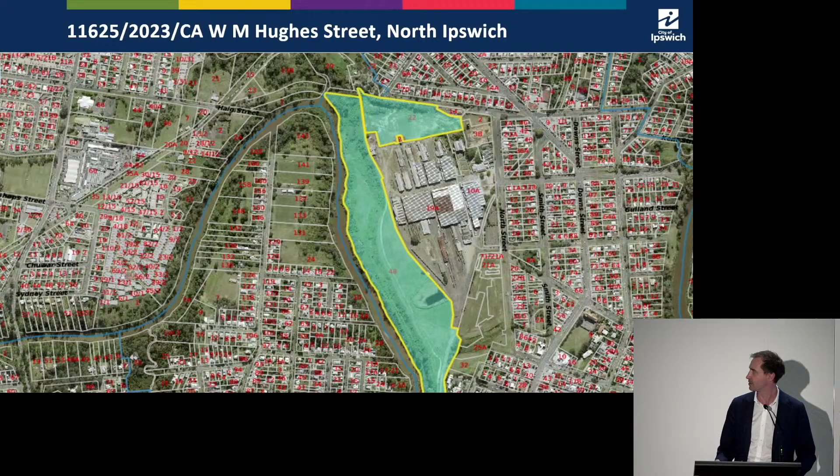Sorry, there's the site, as I'm sure you all know it. And there's the panel members. I forgot to do this before as well. Our speakers today, we've got a number of them. The first speaker will be Boyd Sargent on behalf of the applicant. And then we have submitter presentations from Shane Earle, Peggy Merriman, Liz Tilbrook, Nick White, and Adrian Dean. So we might launch in. And the first speaker, I'll welcome Boyd Sargent.

Thank you, panel chair, elected reps, community for turning out today, as well as the officers for showing up, for this, our opportunity to talk about the application at W M Hughes. This is one of a number of developments that our client has undertaken in this specific area, and this is probably one of the most exciting for Ipswich that we believe is being proposed at the moment.

Just briefly on the proponent, it's LEDA, who have a long history in developing within Ipswich, with over $1 billion worth of development currently underway in Ipswich itself, delivering affordable homes for families and the key workers of Ipswich, and direct and indirect jobs. Importantly, and for this application, they're also the owner of Riverlink Shopping Centre, which provides over 2,000 jobs for the people of Ipswich and would service this development as well.

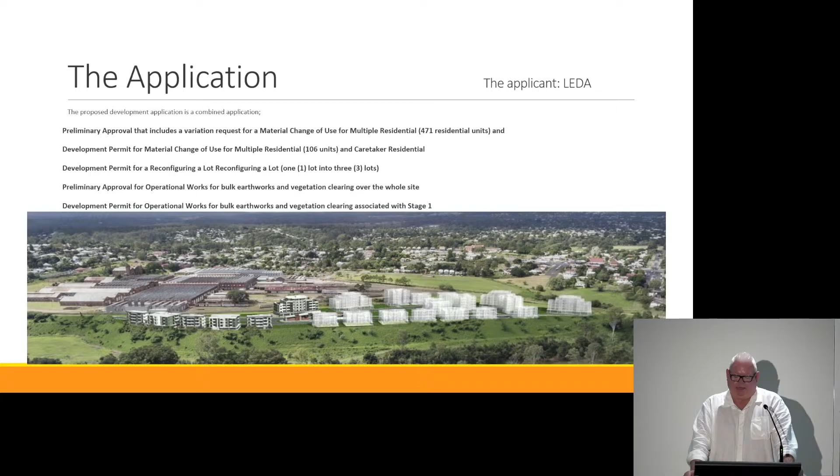In dealing with what we are talking about here today in more detail, what we're talking about is delivering an affordable housing unit complex under a group title management system for the site at W M Hughes. The application includes a preliminary approval. So in terms of the preliminary approval aspect, that sets up the framework by which the future applications on this site are assessed. It includes a number of plans and concepts that would be sought for approval to deliver the overall concept. Importantly, the application also includes stage 1, showing the commitment for development of this site and the ability to deliver housing quickly and in a well-serviced location.

The application, as indicated there, includes a number of other components of development approval, which is designed to enable us to quickly get on the ground and start delivering these houses that are in much need for the location. The proposal does rely on number 22, W M Hughes, for its access onto W M Hughes itself.

In terms of this site, as I've mentioned, it's one of 4 that LEDA is looking to develop and partner with and fund others to develop. The site has been appropriately zoned, as have the other 4 properties, but I'm joined here today by Brendan Nelson, who is from Solve Property, to assist in giving some background to the zoning and this site and the others that occur in this specific area.

Thanks, Boyd. Brendan Nelson, Town Planner. I was a development manager at Ipswich City Council for almost 7 years. Was also the National President of the Planning Institute of Australia, the Queensland Planner of the Year and the Australian Planner of the Year, and was also the head of planning for the Queensland Reconstruction Authority. So I have been working in and around this space for some time.

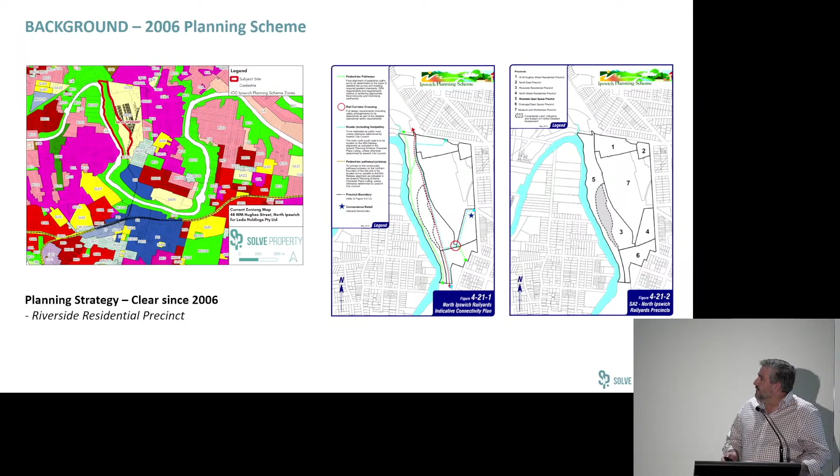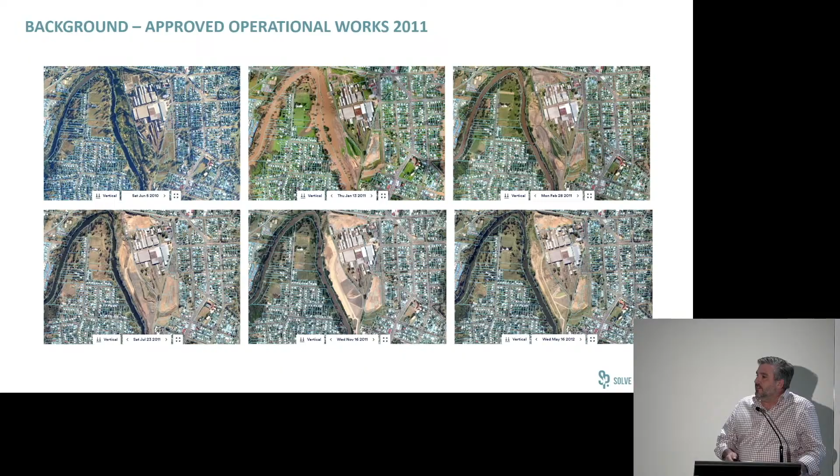There was obviously quite a series of defining events that have impacted this site. And I think it's important that the panel are aware that the flood event from 2011 actually occurred prior to the approved operational works that occurred on site. And so whilst that happened earlier in the year, the operational works happened later in the year, and they were approved engineering works. And so what you'll see in that time series of photos is actually the works that occurred after the 2011 flood event. So when you see flood lines in the old scheme that refer to cutting across the residential precinct, they were predicated on the original flood line before the approved engineering works.

I just wanted to touch on this before I throw back to Boyd. I undertook a review of the site for the landowner in relation to the 2024 scheme, and particularly into the proposal to back zone the site. What I can say to you is that I went through and had a look at Council's feasible alternative assessment report, which is a statutory requirement under the Planning Act.

I think it was an incredibly comprehensive review by Council, and Council should be congratulated. That particular review identified 1,727 lots which were suitable for split zoning across the city. This site was included in that particular group for split zoning, and of the 1,720 odd that were identified for split zoning, there was only 8 that I could find which were back zoned, and this was one of those.

The other 3 of the others were owned by Council. There was one at Riverview where there was strong circumstance to support it, and there was 2 at North Booval where the flood risk was very problematic.

So for the panel, I think it's important that you understand the difference between what's actually transpired under the old scheme, what Council's deliberate decision is in relation to the new scheme to change the zone, and the fact that Council's own feasible alternative assessment report has identified this site as being suitable for a split zone. I'll throw back to Boyd at this particular point. Thank you.

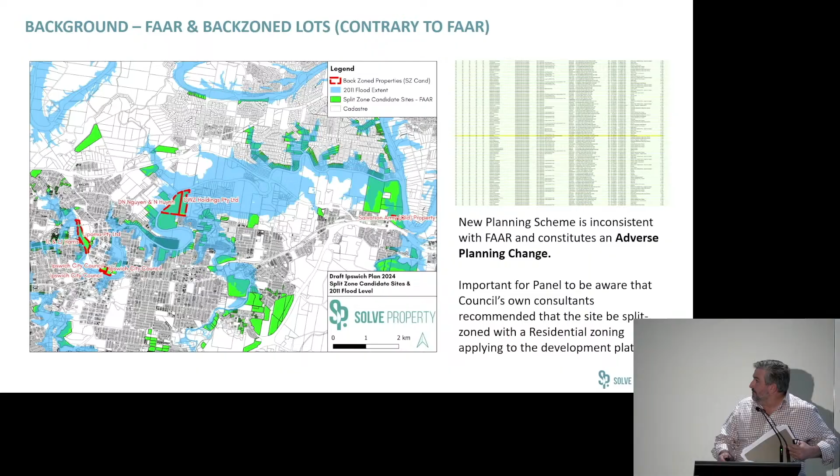Thank you for that, Brendan. That was very important information there in terms of the concept evolution over this site. And it's an important thing to realise that in terms of the application here, a lot of effort and time is spent in developing up these concepts and proposals and plans and drawings and reports that go into delivering a concept for a particular site.

Clearly what drives that and guides that is the planning scheme, and this is an application that's submitted under the existing planning scheme, and we do acknowledge the commencement of the new scheme.

Dealing with the site specifically, as I've indicated from the start, we access via W M Hughes and also through 22 W M Hughes, which has an existing approval which establishes connections in terms of road widths and road heights to our boundary and are transferred through the development itself.

The site, as Brendan's indicated, also has the benefit of an existing approval which has been implemented on and filled to between 19.3 and 21.8 metres.

This proposal, as I've touched on, is to provide over 400 build-to-rent social affordable housing product in a location that is identified, as we've indicated under the scheme, and as you can see clearly from this aerial, is connected to the Riverlink Shopping Centre and the employment, social, recreation and entertainment that is provided via that, as well as the connection into the CBD proper.

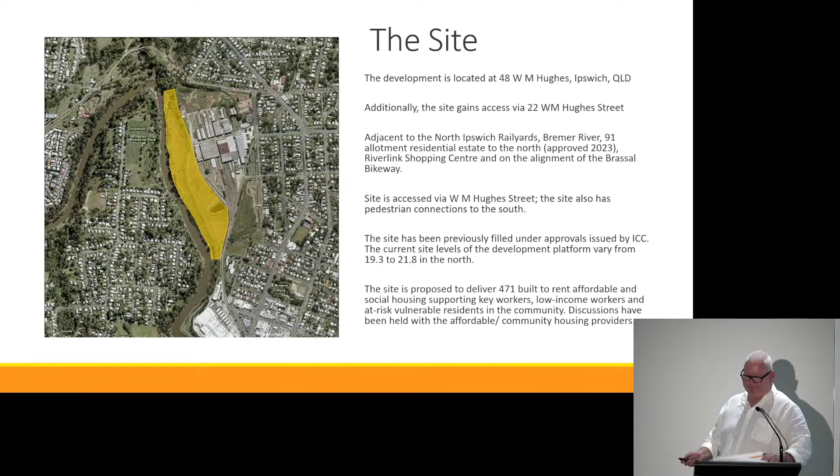As I've indicated, this is an application under the 2006 planning scheme, and importantly, as we've indicated, there's a split zoning on this site currently, open space and the special opportunity zone. That open space area largely reflects the lower terrace area on site and the flood affected areas adjacent to the Bremer River. There is also the special opportunity zone, which occurs on the upper fill platform and adjoins the rail yards.

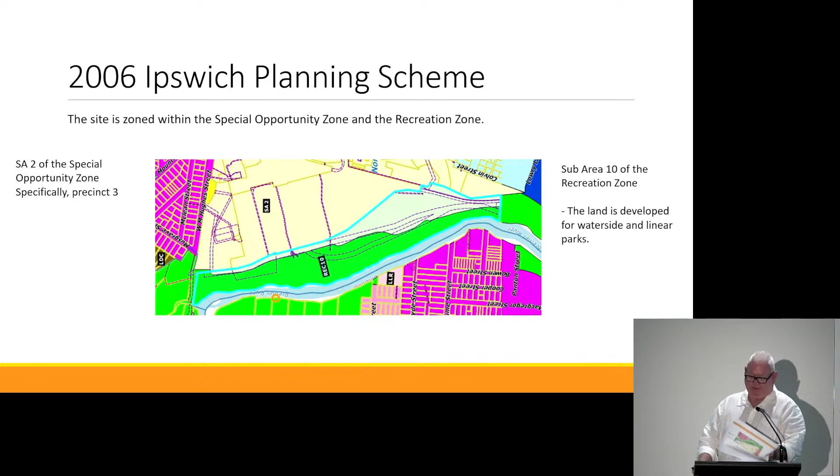Dealing with the scheme in more specifics, and as is outlined in the scheme, and as Brendan has touched on, there are a number of precincts within the planning scheme that dictate what may or may not happen over the site. We have a number of different precincts of which we believe we're consistent with the intent and purpose of. Specifically, the proposal is within Area 3 or Precinct 3, which is shown as the Riverside residential area under the planning scheme.

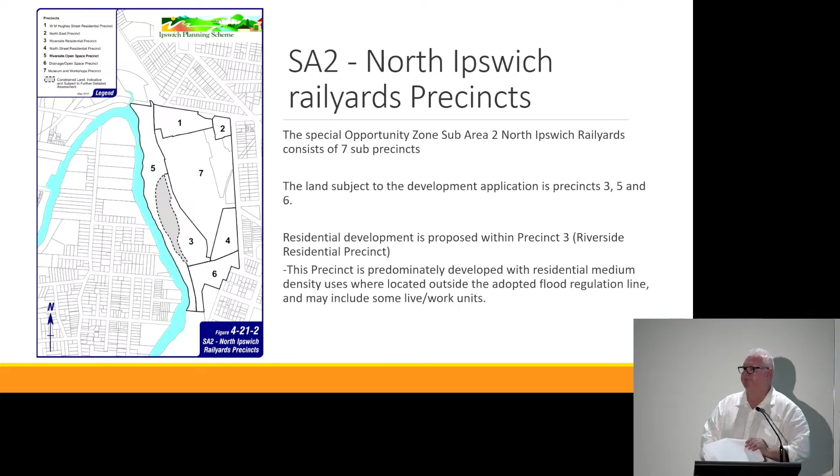In terms of how we've responded to that planning framework, has been the development of the concept plan that many of you have seen and looked at. This has been informed by various experts from heritage consultants, hydraulic consultants, ecology, urban design, as well as traffic issues and traffic assessment. So what's proposed in this concept is a new urban village at the doorstep to Riverlink Shopping Centre, providing this rather higher density development in an area that is perfectly suited and adjacent to and serviced by the principal zoned land under the current planning scheme.

In forming this concept, as I've indicated, a number of specialists have inputted their design, their planning, and their assessment as to what may or may not happen over the site, and it's reflected in this concept.

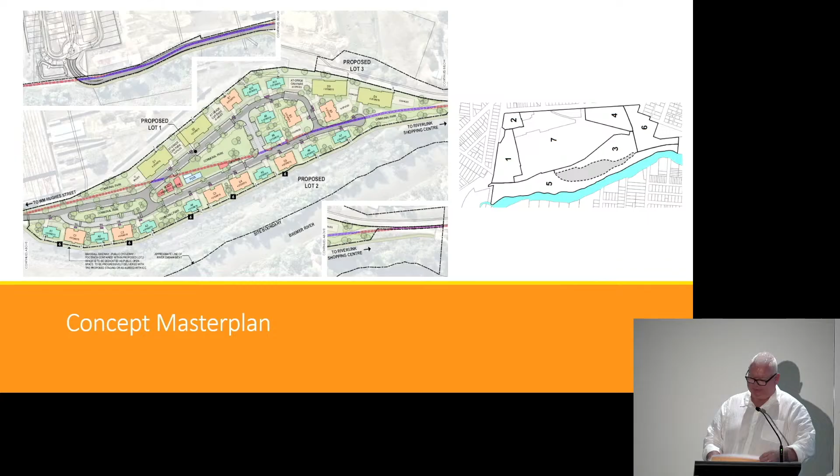As I've indicated, the application also includes stage 1, which includes the first 6 of the proposed apartment buildings on site. These have been informed by a range of input from architects, urban designers, as well as social housing providers who we've already been in conversation with for the delivery of housing in this location.

The buildings are designed and have taken on some of the character elements that are in this location. Character is an important component for the overall development, as we adjoin the rail yards, which has quite a distinct urban character. We've tried to reflect the materials and forms of that structure within our development, noting that we're apartment buildings compared to the industrial building, and then the more traditional residential areas that occur beyond the rail yard.

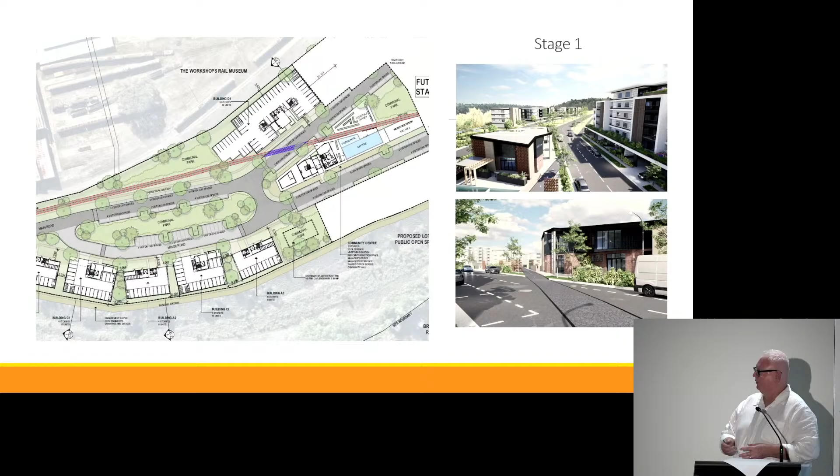In terms of our proposal and the preliminary approval, clearly we've got the existing zoning in place, and the preliminary approval seeks to establish the new boundaries for this. As part of that, we have 3 lots proposed with the application and the zonings that go with those.

Our lot 2, indicated there in the light blue, is the area intended to be open space. The dark blue is the intended urban residential area on the filled upper platform, with lot 3 being existing rail yard lines to the rail yards that are under our ownership.

In discussions with council, there's been an indication not to take public open space as part of the development, which is able to be accommodated with the area still being retained by the body corporate for their management, with easements created to enable key aspects such as the Bremer Bikeway to be delivered through the site. A series of roads will also have easements over them, so the public also has free movement through the site.

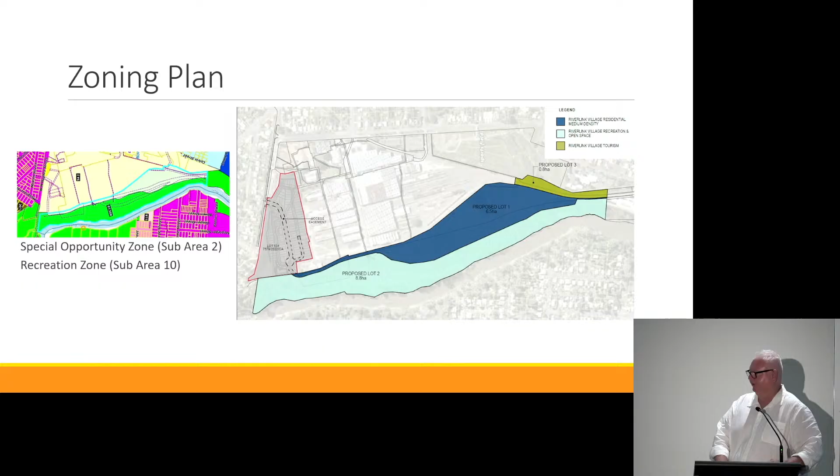In terms of the form, as I've indicated in that concept earlier on, it includes a new urban village. This is centred around an open space area within the filled platform area, and a number of buildings arranged around that cascade from the rail yards down to the river edge of the top of the platform, from 7 stories down to 4 stories.

Importantly, when we review the concept against the planning scheme, you can see the planning scheme is already contemplating multi-storey buildings and apartments at this location. This is an extract from the scheme. Buildings are generally 3 stories in height with the opportunity for 6.

Ours, as I've said, is typically 4 to 7, and that relates to hydraulics, which is why there is a slight differentiation there. I will touch on that when we get to that specific issue.

The buildings have been arranged specifically, again in consultation with the urban designers, as well as the planning issues and view analysis, to make sure that we have cascading buildings overlooking the open space areas and overlooking the Bremer bikeway, to provide high public visibility and a safe bikeway through the development site itself.

Additionally, the buildings are spaced so that we have view sharing, not only internally, but externally. So the residential areas which occur further to the east and are on higher land are also able to view through the development itself, providing a quite permeable development.

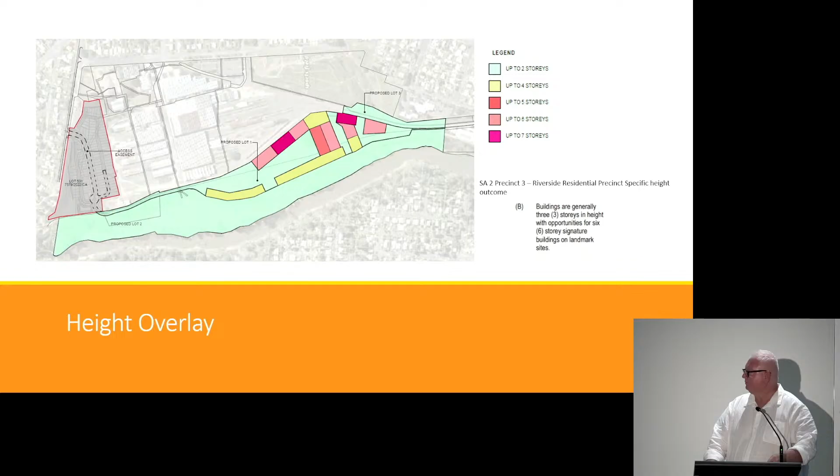Connections, and this is an important aspect to the overall development, connecting this site back to the community and connecting the community through the development and through to Riverlink. As we've indicated, the site derives access from W M Hughes.

That's our only viable access for vehicles, but we have provided active transport routes through the site and through to the Riverlink development, such that the existing community via easements, bikeways and footpaths can walk and cycle through the development, as well as the residents themselves getting through to Riverlink and also back to the wider community.

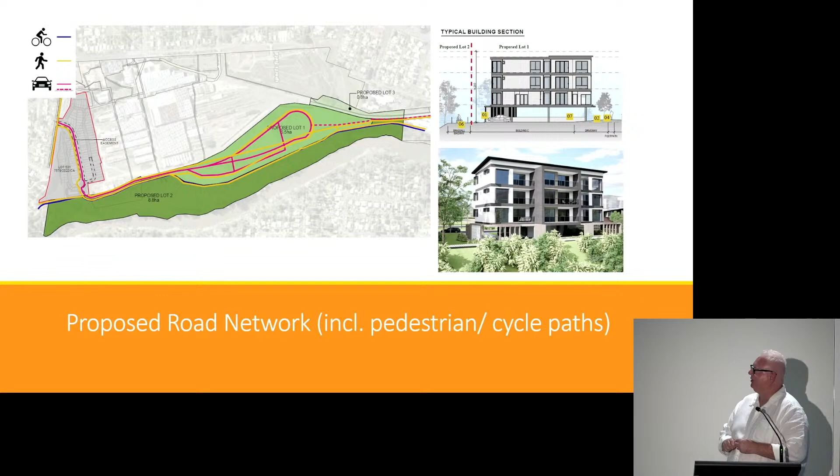In terms of flooding, this is a key issue for the development. Importantly, we recognise the flooding that's occurred in the location, the temporary local instrument that was in place, as well as acknowledging the fill platform that's been established through an approval. We have also taken on board through information requests the assessments to review the new scheme and its planning requirements in terms of flooding.

Prior to developing the site, we obtained a flood search from council which identified the Q20 at 14 metres, as well as the adopted flood line at 22.7. As I've indicated earlier, our building is already filled to above 21 metres in parts of the site.

Importantly, in terms of what this new scheme is saying and this development, what we're able to demonstrate here is that all of these dwellings that we are proposing are above the flood level. No houses get flooded as a result of this development internally.

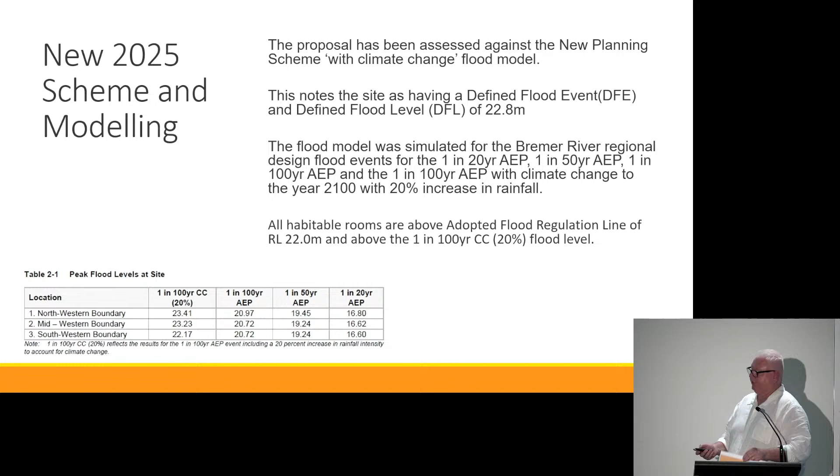But also importantly, in dealing with the assessment of the site works themselves, the regional assessment that's been undertaken assessing the current requirements under the new scheme, as well as the old requirements under the scheme that we've submitted under, show that there is no impact to flooding from the development itself.

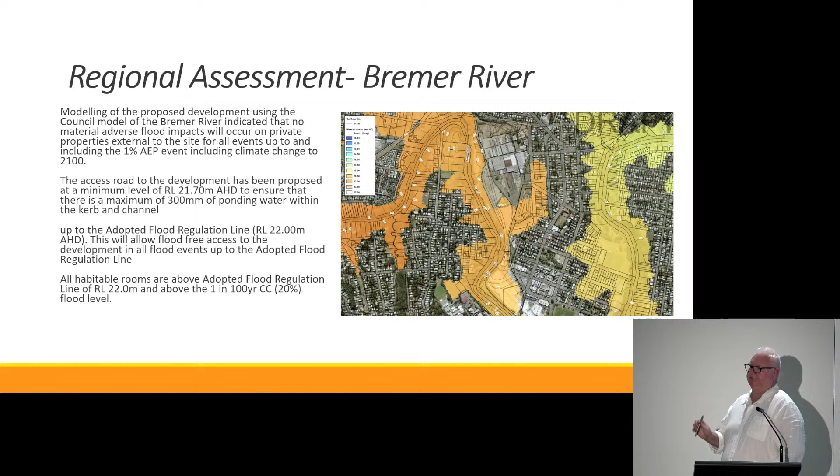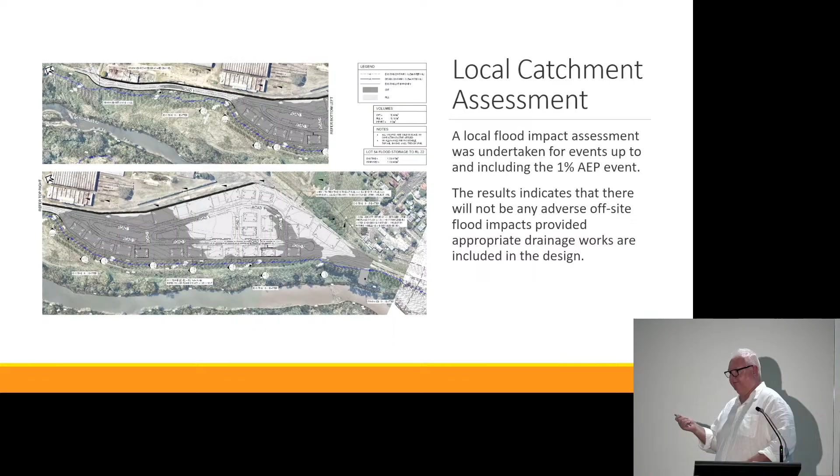There are areas that exist that flood now. We do not impact on those external to the site. In terms of the local catchment assessment, again, there are subject areas that flood around the property, but we do not impact or increase flooding as a result of the development. Importantly, all houses, or apartments, are above the flood level.

In dealing with this, as I've indicated, the development achieves this by being elevated. And this goes back to the stories discussion that I raised earlier. The 3 to 6 levels that are under the scheme have been transferred to 4 and 7 through this development to provide parking at grade level, which increases the height by 1 story.

Now those vehicles are all able to evacuate and exit the site as is required and directed by flood warnings and or by the body corporate which manages this site, which is an important part to any flood evacuation management plan. We have on-site managers that deal with this issue and are able to evacuate people either via the community bus provided in the development, in the hire cars provided in the development, and or by direction from the body corporate managers.

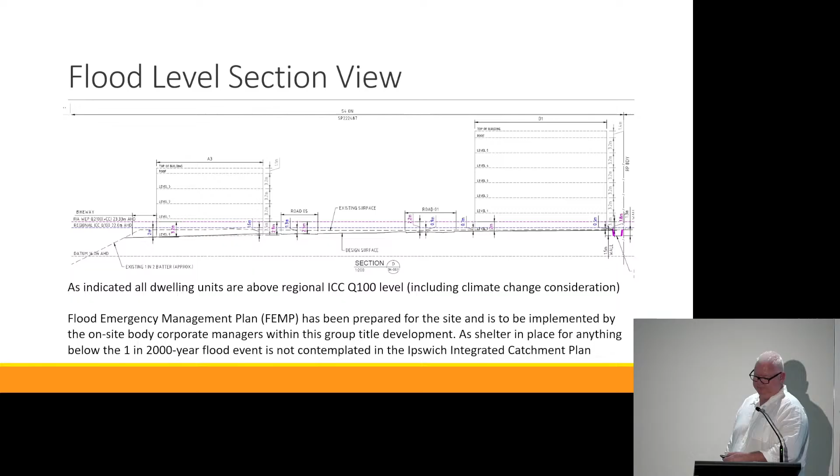Upgrades and infrastructure. We realise that this is a big development in this location, and some of the infrastructure is outdated and needs to be upgraded, and this development does that. This development with stage 1 proposes the upgrade to W M Hughes, as well as a new signalised intersection at W M Hughes with Pine Mountain Road, allowing all movement access and a safer intersection.

And that's the key part here. You have 4 or 5 roads converging in one location currently, with no dedicated or signalised pedestrian crossing. That is addressed by this proposal. Vehicles will now be able to exit W M Hughes in a safe manner, as well as pedestrians.

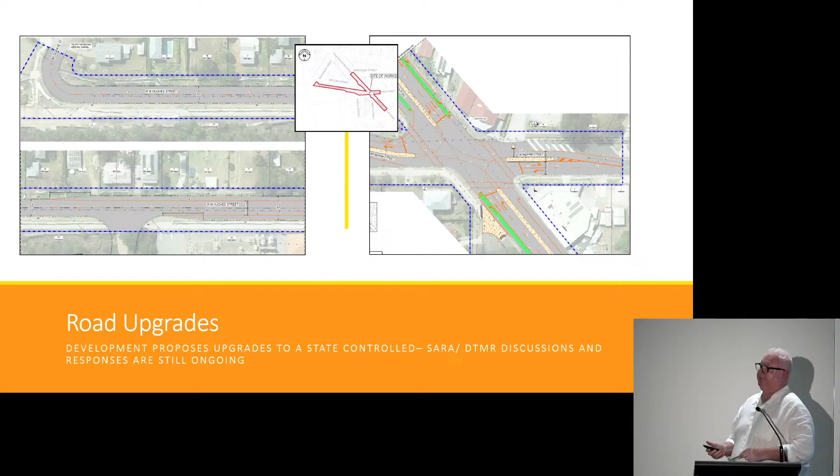In terms of the overall development, a lot of time has gone into making sure that key issues which influence the design are factored into the development itself. We're seeking to develop a new village in this location. We appreciate that's a change, but it's a change that's contemplated currently in the scheme for us, and we believe we are reflecting what the scheme has outlined for the development of this site.

As I've indicated, we are an application that's assessed under the planning scheme. We believe that we're consistent with the 2006 planning scheme. We've also had regard to the new planning scheme, specifically in relation to flooding issues. We believe through this managed new village next to the principal centre at Ipswich, we're able to deliver these needed and essential housing options in this location and have the ability to do so rapidly. Thanks.

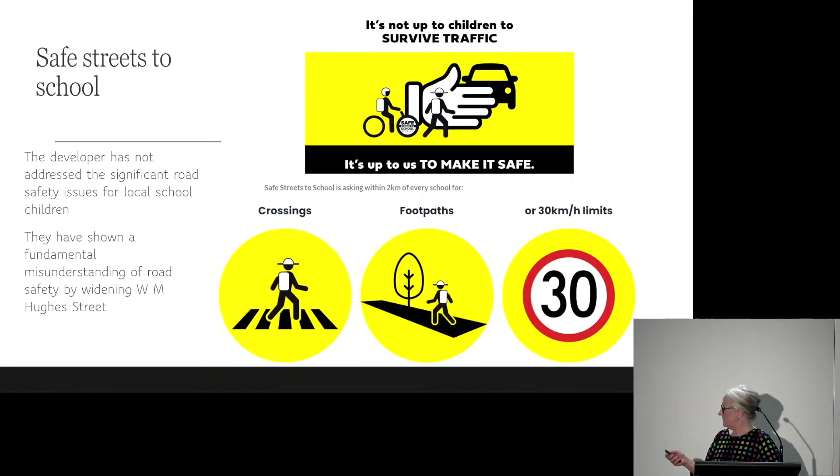Impact on the safety of the council's Brassall bikeway and walkway. I know it was mentioned that that's all going to be diverted through the new development, but I'm sure this one's still going to be functioning and lots of people and local people use it. There are many elderly people in that precinct. W M Hughes Street provides access to this wonderful piece of community infrastructure. It's heavily utilised by local children and adults on bikes, residents exercising or walking for mental health, and individuals using mobility aids and wheelchairs.

I see them every day use that bikeway. Increased traffic will create significant hazards for users of this shared space, discouraging vulnerable members of the community, including children and elderly residents, from enjoying it. This will not only compromise safety, but also diminish the community benefits this bike walkway infrastructure was designed to provide. It's not just for people to go through the new development to use the shopping centre, it's for everybody in the area.

So most importantly is resident safety, the people who are going to live there. I'm most concerned about. Greater consideration must be given to the safety of residents in both proposed developments, as they both rely on a single entry and exit point via W M Hughes Street, as explained, and a right turn only solution at the exit will not address these problems.

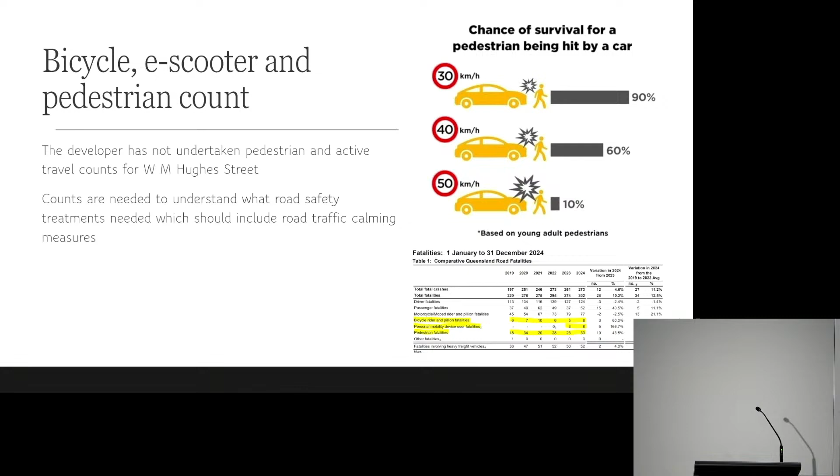And I've forgotten my phone, I need it. Sorry, I just want to quote the Insurance Council of Australia, just the recent. There's been a lot on the ABC lately about insurance, building in unsafe areas.

So the Insurance Council of Australia, ICA, advocates that building on unsafe lands such as high-risk floodplains leads to homes being increasingly uninsurable or prohibitively expensive to insure, with a significant lack of flood cover in such areas. They support developing a national standard for land use, planning and building codes that considers disasters and climate risk, including prohibiting development in high-risk areas.

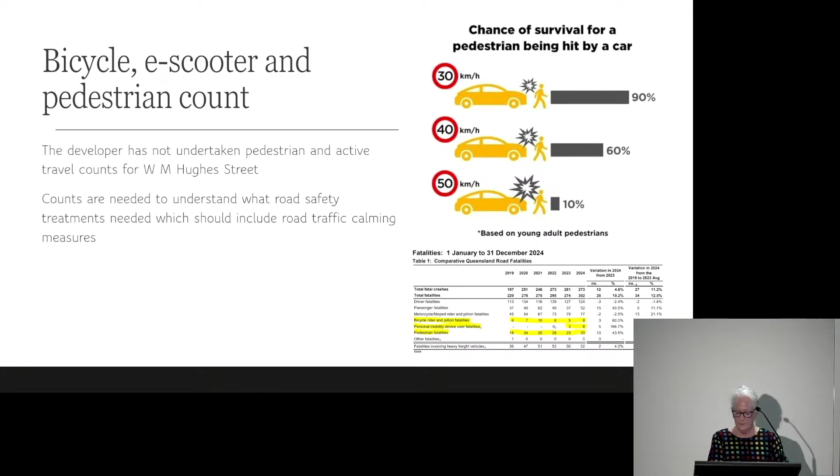In conclusion, I'd like to say, I didn't go to the next. That's just about the exit, talks about why they can't look at another exit other than W M Hughes Street.

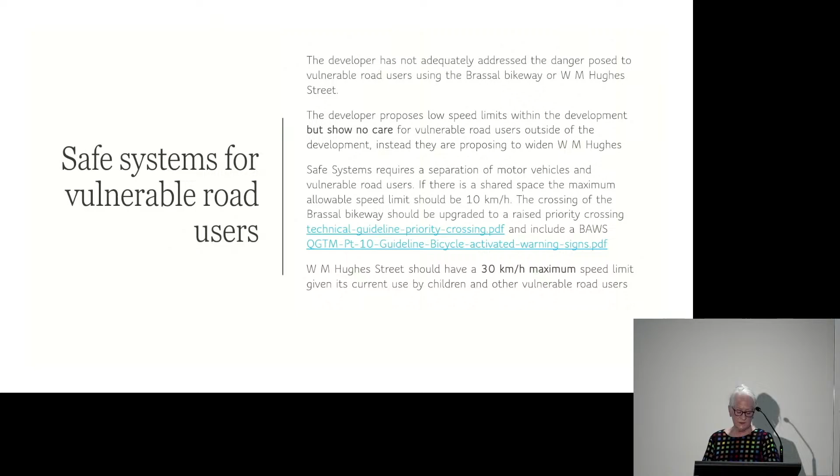So in conclusion, as Ipswich economy passes the 15 billion mark, these developments will not help prepare for this growth, only add to an already stretched infrastructure and the cost to council to house people temporarily when there's a flood. They have to be evacuated. The showgrounds can't take all of these extra people, so they're going to have to find some other solution for that, and the cleanups and the repairs. It'll all be the council's issue.

Developers made his money, he's gone, great. Someone else's problem. Ipswich is the oldest historic city in Queensland, and the potential for tourism for the city, which was touched on before, is only just beginning. Let's not let this proposed development downgrade this potential. Lost opportunities are irretrievable.

It will be a travesty for this unique historic pocket of Ipswich to become a congested, unsafe suburb with an ill-conceived development on its doorstep. It sounds to me like a dumping ground for the unfortunate, and I think that's dreadful. Thank you.

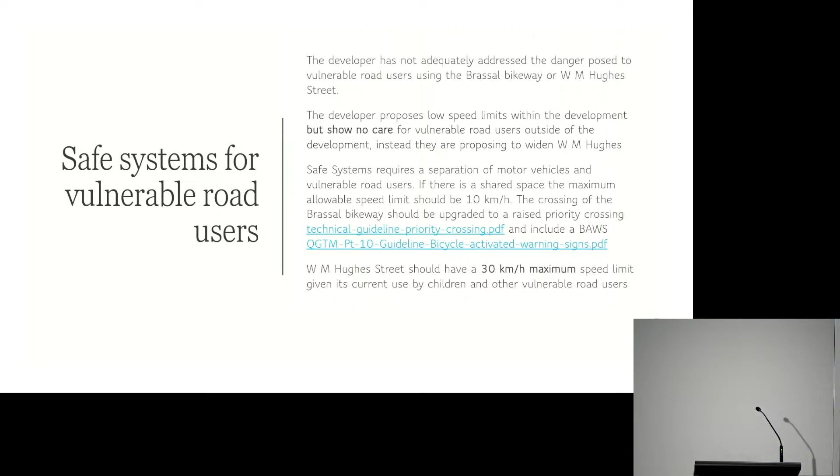Okay, does it have a pointer? I don't know, do you know if it's got a pointer? Don't think so.

Good afternoon, my name is Liz Tilbrook and I live in Woodend. Like many Ipswich residents, I am deeply concerned about the amount of affordable housing available in Ipswich. But we Ipswichians are also very flood weary.

The last thing we want to see is more residents put in harm's way during flood emergencies. This development application is seeking to build 472 new units adjacent to their shopping centre. Yes, the habitable floor areas may sit above the RL 22 metre flood line, but this site is a flood island. In a major flood, unless everyone is evacuated, they will become stranded, creating an additional burden for the Ipswich emergency services.

Boyd talked about the flood emergency plan. The developer's plan is frankly unworkable. There is only one way in and out, a single driveway for these proposed 472 units, plus sharing that same driveway with 93 townhouses. This is a recipe for chaos in an emergency. And all car parking is on a floodable level, meaning any vehicles left behind would go underwater.

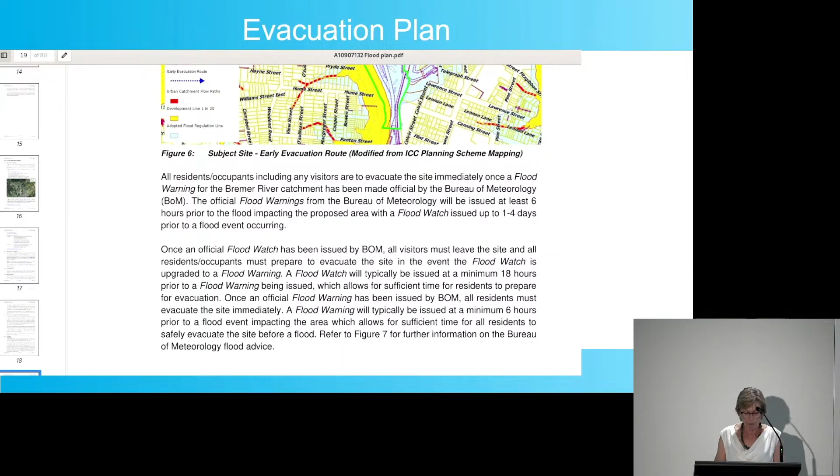This slide shows the emergency plans guidelines. We don't even have flood watch in Ipswich. I'm not sure where they're coming from, in Queensland.

What happened? They say the lifts will remain in operation. Quoting the plan, they say lifts will remain in operation so residents can access the rooftops and wait for helicopter rescue. Really? Helicopter evacuations for up to 1,500 residents across 23 towers? A helicopter can carry up to 5 people per trip, so that could be up to 300 rescue flights.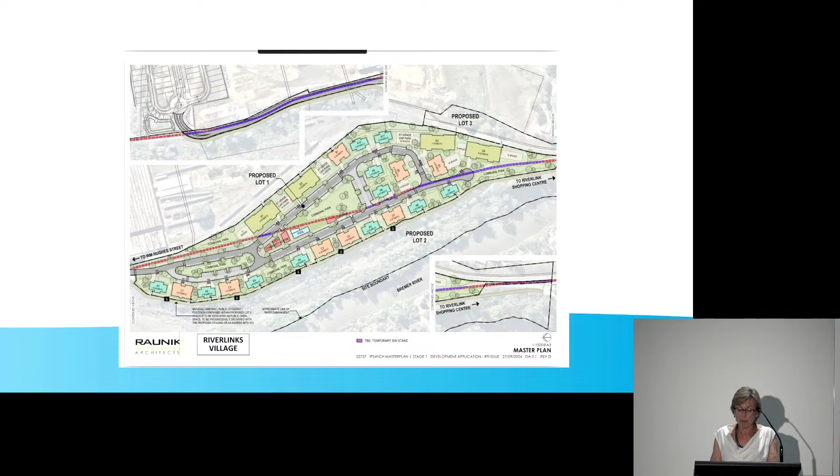We do not need 1,500 more people living under constant flood anxiety and at real risk of being stranded in a major flood event. Taxpayers don't need the bill for another inevitable buyback. What we do need is open space along the Bremer River, protecting the waterway corridor and extending the amenity of the Railway Workshops precinct. That is the vision of the 2025 planning scheme and the vision that the people of Ipswich can support.

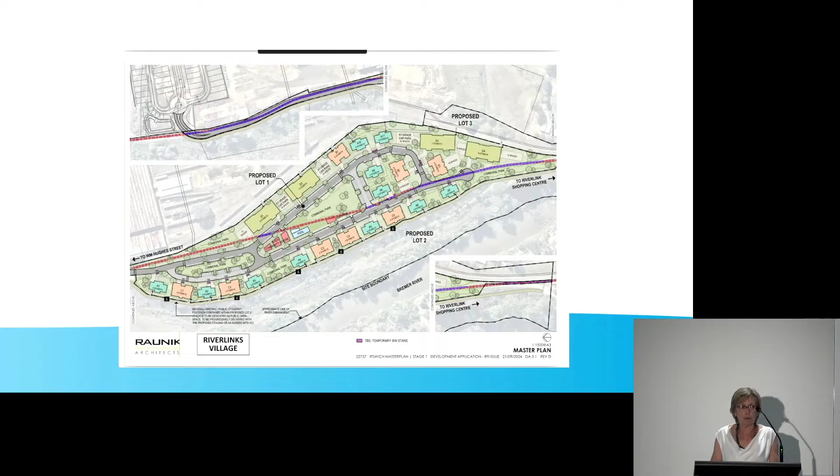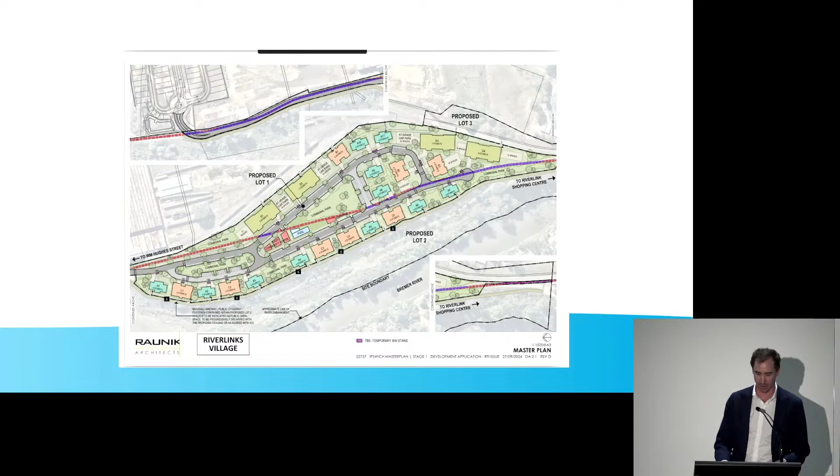Thank you, Liz. Our next presenter is Nick White.

Afternoon all, my name's Nick White. I'm a resident of Woodend and a past president of the Bremer Catchment Association. And I'd like to thank the previous speakers for their erudite explanation of what is going on here. I'd like to focus my speech on three major aspects which should prevent this application from proceeding. They are floodplain capacity, an overall view, including the demographic implications, dynamics of flood behaviour predicted and observed, and a critique of the applicant's replies to the submissions.

Floodplain capacity. Back in the day, well, this is not before European settlement, obviously, but back in the day, the bank from the Bremer River was a gentle slope up to Down Street. The river had far, far more flood capacity than it has today. After the arrival of Europeans, the landscape changed considerably, wholesale clearing in the late 1800s, and the first stages of riparian infill had already commenced.

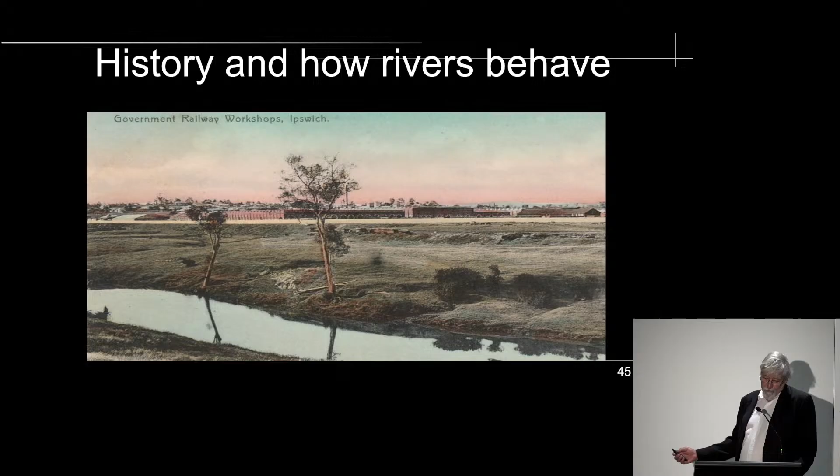You might notice that the railway yards there are actually built up. It must have been a cautionary tale when the floods of 1893, 1894 inundated the workshops. And at this time, the flood capacity of the river was much, much larger than it was today and had not been changed by anthropogenic interference. However, the more recent floods of 1974, 2011, and 2022 have been far more damaging.

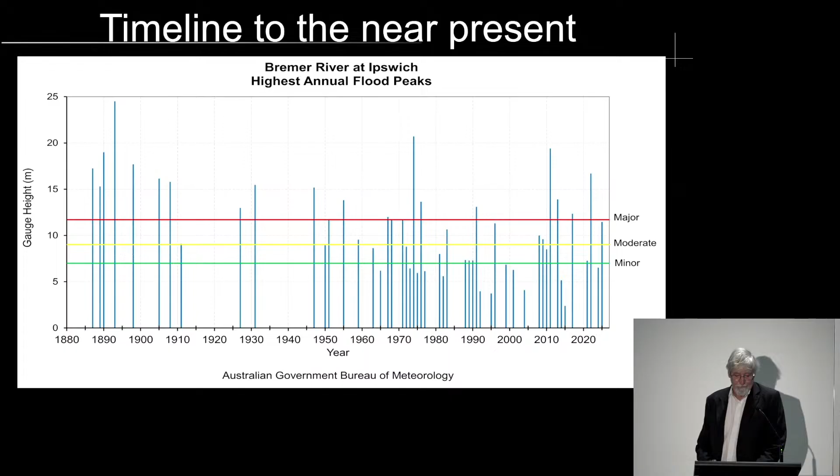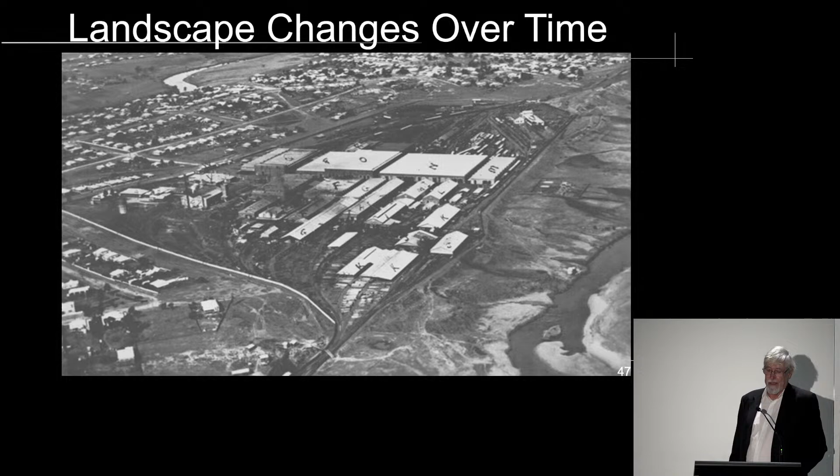The development of the workshops required the establishment of a more extensive platform, and you can clearly see the erosion already occurring between the fill and the bank. This infilling of the floodplain continues today from City Switch in Ebbw to the Riverlink Shopping Centre in Ipswich City. There's a little bit of questionable workplace health and safety going on here.

As Dr. Margaret Cook wrote in her book, River with a City Problem, poor floodplain management has consistently worsened the effects of even minor floods. On this site, decades of modifications have altered the hydraulics of the entire reach. The Riverlink shopping centre alone has changed the flow regime.

Now, since 2011, I have noticed, and I'm sure everybody else has noticed, especially those people who just look down the river at River Heart Parklands, that basically the river is asking for its flood capacity back again. So there's collapses into the river. Even Riverlink Shopping Centre has got a few problems at the present moment.

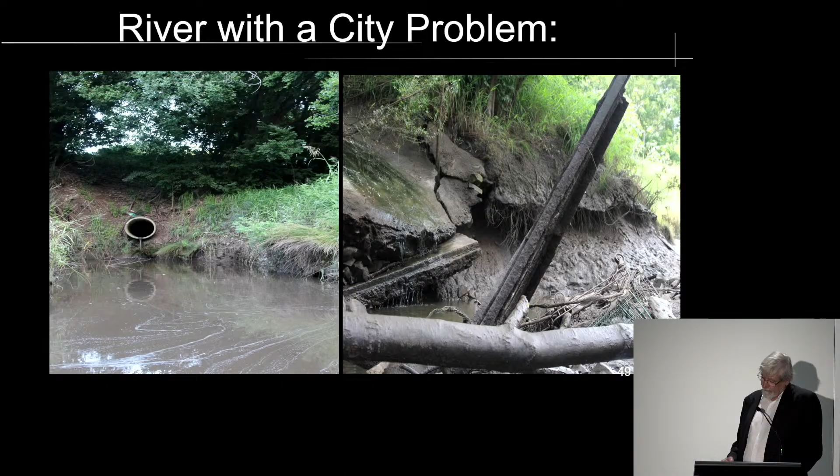This slide is close to where I mentioned the locomotives beforehand. This is a major slump on the river. It's thousands of cubic metres, and this batter was supposed to be a 2-in-1 batter. It's much closer to 1-in-1. Backwards.

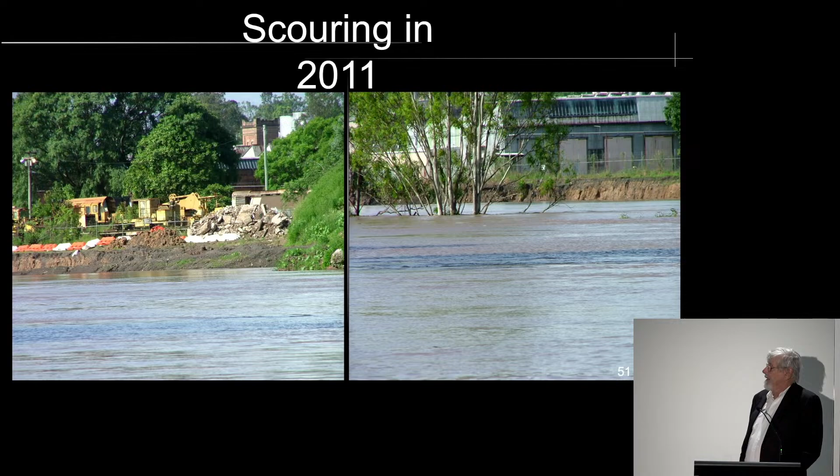This is an example of what was happening in the 2011 floods. And just to put this into context, the area on your left is where the proposed roadway is as the escape passage. It was an amazing flood. It scoured that bank completely out, and lots of it collapsed in the river.

This is a shot from Hughes Street, looking straight across to Canning Street. Now, there's a railway line there, but you can't see it, it's underwater. Now, I was assured by the developers there that that flood level didn't cover there. Looks like it did.

Now, I turn to the actual application, and I realise it is on the 2006 town plan, but the application went through in 2023. In the application, the area circled in red was noted as a sports ground. Well, at that stage, it had been built up 3 metres. It had a number of houses on it. And, you know, we're supposed to take this on face value. It's not a sports ground. Okay.

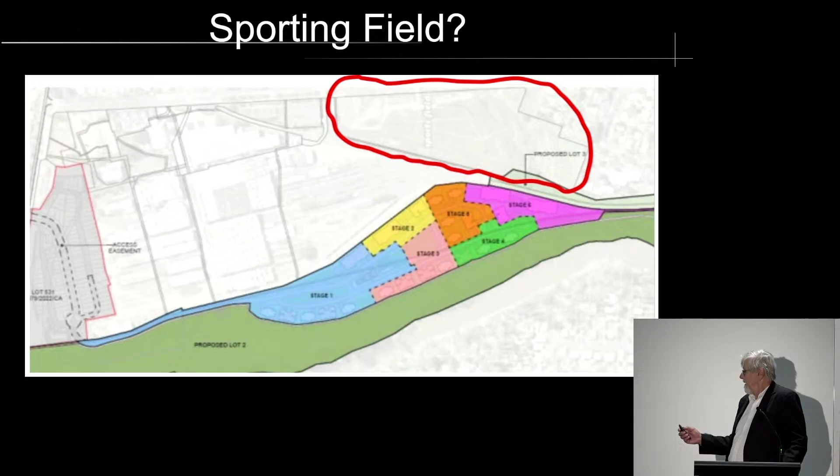The escape route. The escape route is on the current plan built up to RL22. And that focuses all the traffic onto a roundabout, which is supported by a retaining wall on the riverside. This structure is going to be placed at a point where a number of factors influencing flood behaviour happen. I'll come back to that. As you can see at the top of the picture, the river takes a right angle bend.

Now, river water, especially when it's flowing fast, has a momentum. That momentum, when it has to turn a corner, actually builds up. So in the 2011 flood, I would have estimated that the area where the roundabout is supposed to be was probably around about 1 metre higher than the height of the river on this side. And the other rule of thumb, of course, is the further you go upriver, the higher the flood peak gets.

We often discuss flood height as the major part of river floods, but velocity is extremely important. And here the modelling shows on a 50% AEP flood, not a big one, the speed of 2 to 3 metres along the Bremer edge, that's in red there. Now, 2 to 3 metres on that kind of soil causes immense erosion. I was going to bring a sample along and shake it up as an exclamation, but basically the bank just dissolves.

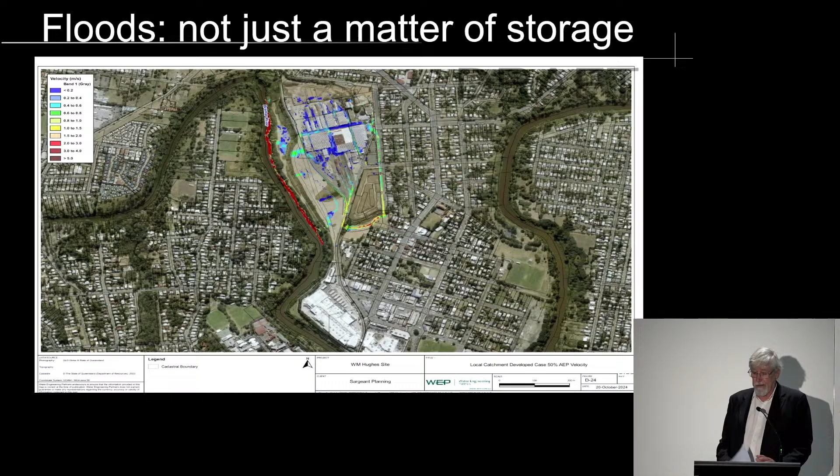I'm pretty conscious that in this room at the present moment, there are people who can affect the future of this project. And from my reading of the Ipswich population, there is a very, very strong support of leaving this place as public open space and keeping it in tune with the character of Ipswich. I'm getting a slight wind up here, so I'll leave it there. Thank you for your indulgence.

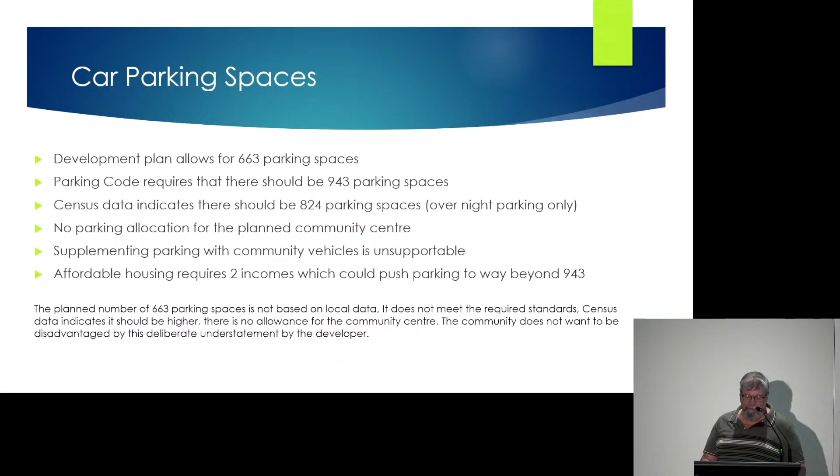Local traffic generation. The DA assessments were made using requirements from 2002 and 2013. Calculations were based on a very small number of trips per dwelling. Whilst this may have been the case 20 years ago, it's certainly not the case today.

These dwellings will require 2 incomes to support them and far more than 1 vehicle per dwelling that will come and go several times a day and will create a sizable impost to the local infrastructure and the community.

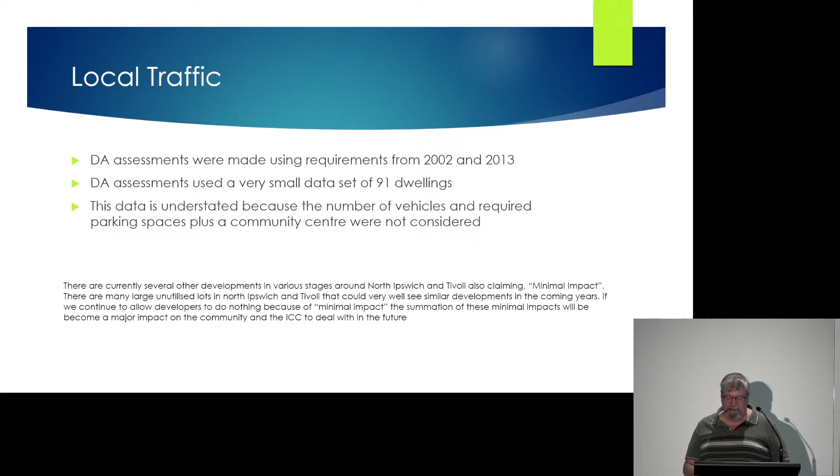By seriously understating the number of vehicles that will be parked in the development, the entire traffic generation modelling for the surrounding areas is probably also wrong, and was based upon, as I said, guidelines from 2002 and 2013. That's actually in the documentation that's on the Ipswich City Council website.

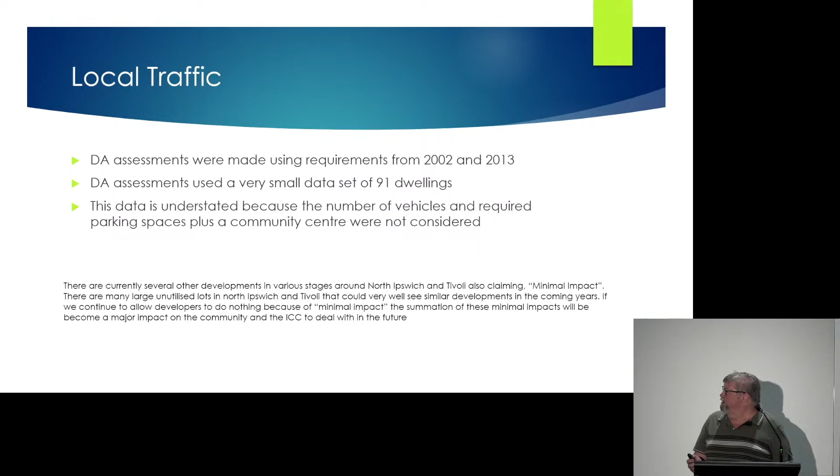The existing bus stop is a 1.2 kilometre walk from stage 1 of the development, along a route that includes several hundred metres along a road where there is no footpath. It's questionable as to whether residents will make the trek to use the local bus stop or not.

Somehow along, the developer should be responsible for improving this situation to provide bus stops closer to Hughes Street, rather than it becoming a problem for the community and the Ipswich City Council to deal with in the future.

In closing, 471 units is a large development for Ipswich and probably the first of its size for North Ipswich. A lot of the assessments for the surrounding infrastructure in this development application make use of the term minimal impact. There are currently several other developments at various stages throughout North Ipswich and Tivoli also claiming minimal impact.

There are many large unutilised lots in North Ipswich and Tivoli that could very well see similar developments in the coming years. If we continue to allow developers to do nothing because of minimal impact, the summation of these minimal impacts will become a major impact, and the community and the Ipswich City Council will have to deal with this in the future.

Developments of this scale must provide more and improve the surrounding infrastructure of roads, footpaths, parking, bus stops, etc. It's not up to the community to suffer the long-term consequences caused by developers deliberately understating the facts and doing so to maximise their own profits. Thank you.